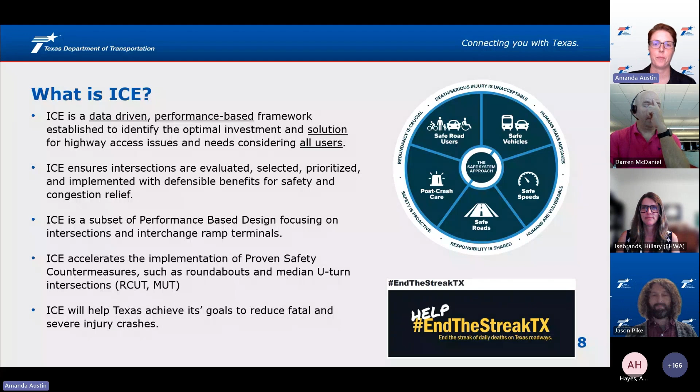Happy Free Slurpee Day.

I'm going to run through the memo that was recently issued by our chief engineer. I want to make sure that everyone understands all the key components. Now, obviously, it's only 1 page long, so it's not going to tell you exactly the whole intersection control evaluation process, but it does reference the new Traffic and Safety Analysis Procedures Manual, which we just published back in June.

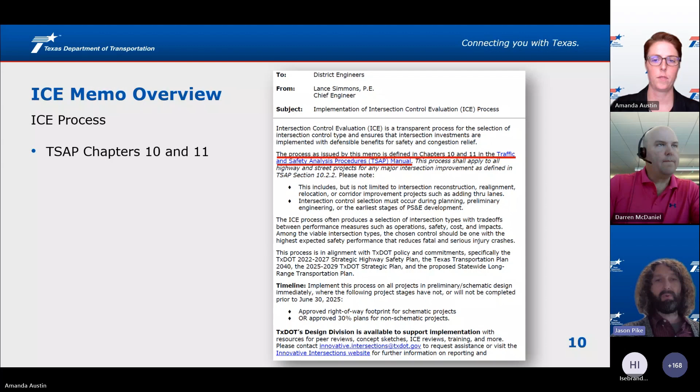Chapters 10 and 11 explain the process in detail. Chapter 10 is for intersection control evaluation, and Chapter 11 is interchange control evaluation. So it is the same process in both chapters, just different types of intersections. The next section of the memo talks about section 10.2.2 of the TSAP manual, which is what I refer to as the abbreviation for that Traffic and Safety Analysis Procedures Manual. So if you hear me say TSAP, that's what I'm referring to. But that does give specifics on when to apply the ICE process as well.

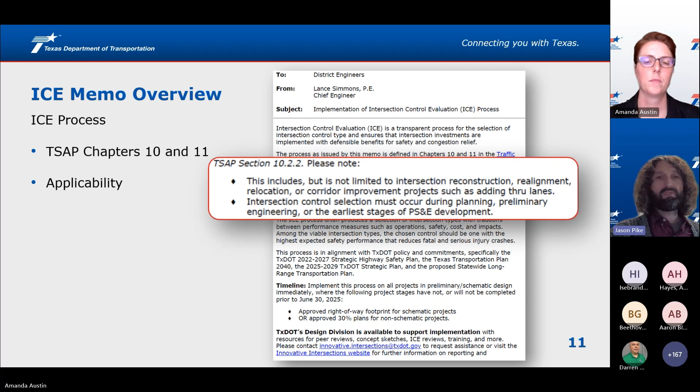And Amanda's going to cover a little bit more in detail later on the when, but the overall intent is, whenever you're reconstructing or significantly changing an intersection, that could include your corridor projects when you're adding through lanes. Anytime you have any of those projects where you're affecting an intersection or corridor projects where you're adding through lanes, that's when you should be doing the ICE process for each intersection.

So, we don't want to just evaluate the one trouble spot because all intersections have conflict points, as we mentioned. So again, we should be performing that ICE process on each intersection. And it should be done as early as possible in the planning or preliminary engineering stages as well. Let's see the next section here.

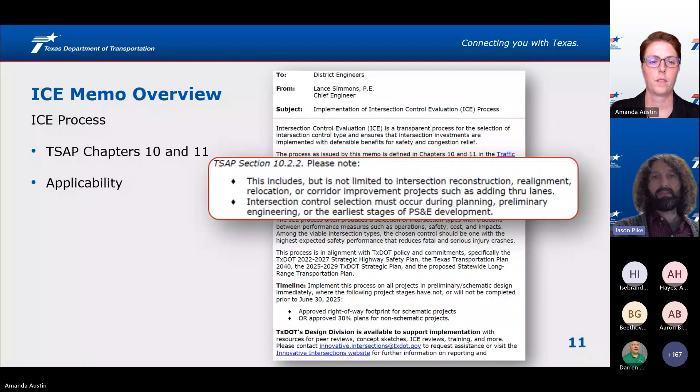So, obviously any analysis is going to produce trade-offs between alternatives. And I do want to emphasize that, I know we've talked a lot about safety here today, but the great thing about this intersection control evaluation process is it includes operations and other impacts. It's not just a safety evaluation. So when we talk about giving you a process to produce viable intersection types, it's going to take all of those other factors into account as well.

Again, as we've heard a few times this morning, in a transparent and defensible way. So you'll have some actual data to back up your viable selections there. Now, again, every project is a safety project, so we do want to emphasize here safety first. So among those viable intersection types, the chosen control should be the one with the highest expected safety performance.

So that's kind of the goal here, but I did want to at least emphasize here that it's not just a safety review, it's safety analysis, but this is also going to tell you which one of those underutilized intersection types will actually perform from an operational standpoint as well. So it is good tools for those folks who don't have as much experience with R-cuts or DDIs or any of those other intersection types. It'll be able to tell you very quickly which ones will perform.

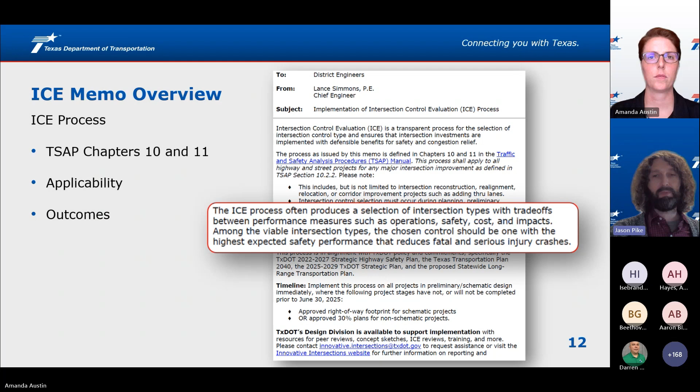And then again, I do want to emphasize, I can't say it enough, every project is a safety project. So once you've got those viable intersection types, be choosing the one with the highest safety performance. Let's see the next section here.

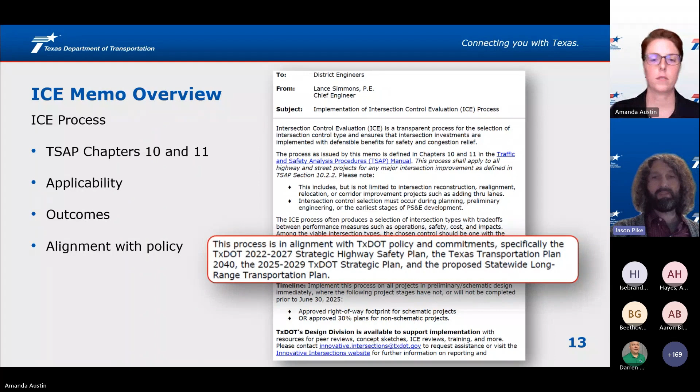The memo talks about how the ICE process is in alignment with several major TxDOT policies and commitments. And I won't go through all of those, but we do have a nice slide here that does go through several of them. For example, the Strategic Highway Safety Plan has intersections as an emphasis area and a strategy specific to ICE as well. Several other TxDOT planning documents prioritize safety along with the strategic plan goals of delivering the right projects and optimizing system performance.

As previously noted, ICE is about producing a transparent and defensible decision for the best intersection option. And then obviously the roadway design manual will discuss intersection control evaluation as well. And the upcoming roadway design manual update is going to have an entire chapter devoted to all the alternative intersection types.

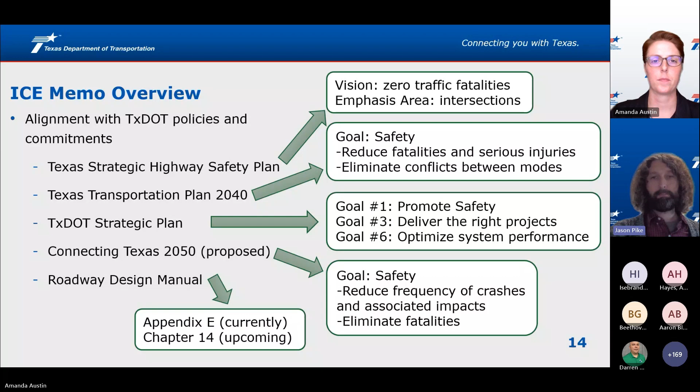All right, so the timeline here, the intent of this timeline of implementation is to catch projects early in planning and preliminary engineering stages. So I'm just going to kind of read this right off the screen. There was a lot of work that went into crafting this and a lot of feedback from districts and otherwise. So I'm just going to read it right off the screen to make sure I don't screw it up.

But the timeline is to implement this process on all projects in preliminary or schematic design immediately, where the following project stages have not or will not be completed prior to June 30th, 2025. And that is approved right-of-way footprint for schematic projects, or approved 30% plans for non-schematic projects.

So a quick note, I know not all districts necessarily have an approved right-of-way stage, but again, it's intended to be for when you guys are kind of locked down on your right-of-way. That's when we expect you to be performing that.

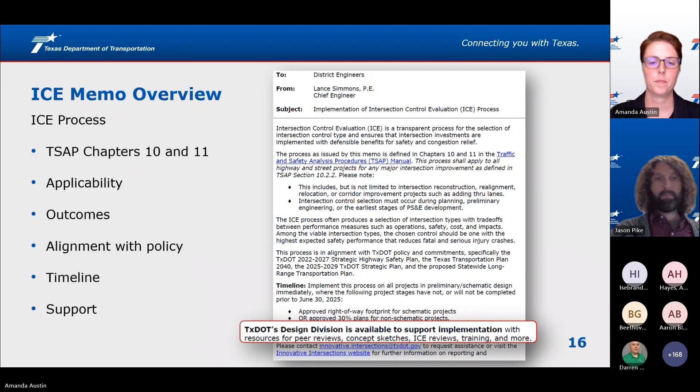All right, and finally, Design Division is available to support the implementation. We want you to be successful in implementing this. So we will be providing training and many other resources, which again, Amanda will cover here shortly.

But again, the real reason we're doing this here is, as Mo led it off with very well, and I think has been mentioned a couple other times by Millie and Hillary, 32% of our fatalities are intersection related. I know a lot of those other things are maybe more behavioral type situations with seatbelts, speeding and distracted driving. So intersections are something where we can actually take a big bite out of that apple. We can actually make an impact. And that's why this is such an important thing.

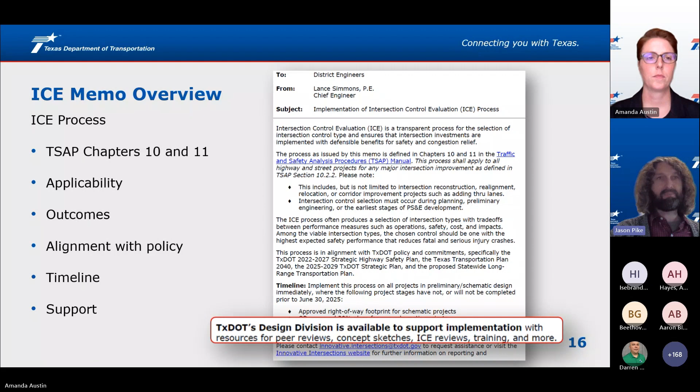So that's basically the high level thing of the memo. And I'll turn it back over to Amanda to talk through some of those resources and details. All right, thank you, Jason, for walking us through that. So as he said, I'm going to go over some more details in each of those sections and then talk about trainings and resources.

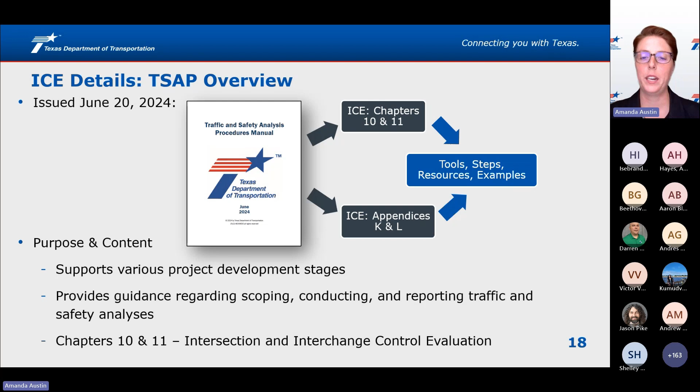So the TSAP, as Jason mentioned, the Traffic and Safety Analysis Procedures Manual, was issued June 20th, 2024, and it is available online on our manual site. Chapters 10 and 11 and the corresponding appendices, K and L, give tools, steps, resources, and examples for ICE. Now, overall, the purpose and content for the TSAP is to support all the project development stages and provide guidance specifically for scoping, conducting, and reporting traffic and safety analyses.

Now, to talk a little bit more about what's in chapters 10 and 11, it's going to give context, which includes workflow, applicability, and the different intersection types for ICE, and then it's going to outline a process. The process is a two-stage process. Now, stage one is high level. The level of effort is anticipated to be minutes or hours and not a major effort. Stage one looks at operations and safety. Operations more for viability. Will it even work? And then of your viable types, taking a ranking look at safety.

The primary tool that the TSAP recommends for operations is CAP-X, and for safety is SPICE. Now, please note that each of these tools have limitations in that they are planning level. In one of the appendices, Appendix L, I believe, there's a reference to a CAP-X-similar tool that does operations for interchanges. So it includes a few more options than the original CAP-X tool, which has mostly intersections.

So we provide all those tools, narratives on each, but using these tools, CAP-X and SPICE, are very, very quick. I did it myself. You put in your ADTs or your turning movements, and you get your results. For operations, it's looking at volume to capacity ratio. For safety, it's using predictive crash analysis, and it produces the predicted crashes, both fatal and injury, and all types of crashes for each of your intersection options.

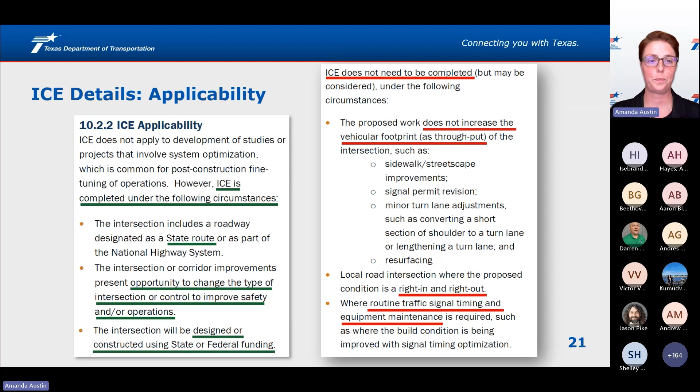So reporting, what do you do with an ICE once you have it? The ICE is primarily at the district level, but we have two ways that we would look at it at the division level. So we're working on updates to Form 1002 that will likely come out this summer, and the DSR will be updated and will likely come out at the same time as the RDM this fall.

With 1002, the section in 1002 will look very similar to the VE study section, and it basically asks three questions. Is an ICE required? Yes or no? If it is required, has it been completed? Yes or no? And if it's been completed, attach ICE documentation to this form. And so when you submit the 1002 to Design Division, we would expect to see the ICE documentation with it.

Now, one big question we get a lot is, how is Design Division going to be reviewing these? And it's going to be a high-level review. We will get the documentation, and we're really just checking to see that you're completing ICE, that you're looking at your options, that you're strongly considering safety. And really, we're only going to start talking with you if we're seeing something that looks amiss.

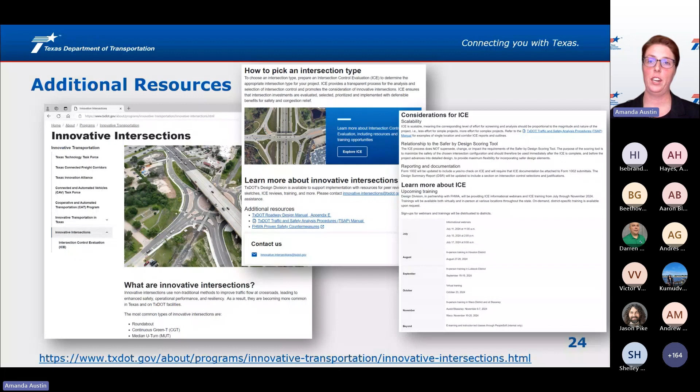If you are TxDOT, we will put you into the class immediately until we fill out the capacity. And if we have capacity within a week or two of the training occurring, we will then open it up to external. So if you are an external person on the call and you'd like to attend this workshop, fill out the form. We will reach out to you to add you to the wait list.

As Jason mentioned earlier, we are here to help. We really want this to be a success. We're very driven to improve our intersections, and we want to make sure that each intersection is a success as well. So we have the capabilities and the resources right now to help you. We want to be a resource for you. We can provide coaching, support, review. If you're listening to all this, making your head spin, you're not sure where to start, give us a call. We can talk with you.

If you're a consultant, or if you are getting a design from a consultant and you want a second set of eyes on it, we can do a peer review. In particular, what we really like about peer reviews is we don't just redline it and send it back. We really encourage having a meeting, talking through comments, because we see those as educational opportunities so that each time we get a design, it's better.

We can do concept sketches. We know roundabouts, like I said, are pretty tricky to get right. And so if you are considering a roundabout but aren't sure how to draw it or where to start, let us know. We can do the first concept sketch for you. We can work with you to draw it so that you're learning how to do them, but we can provide those. If you need a high-level sketch to determine your footprint, we can help with that as well.

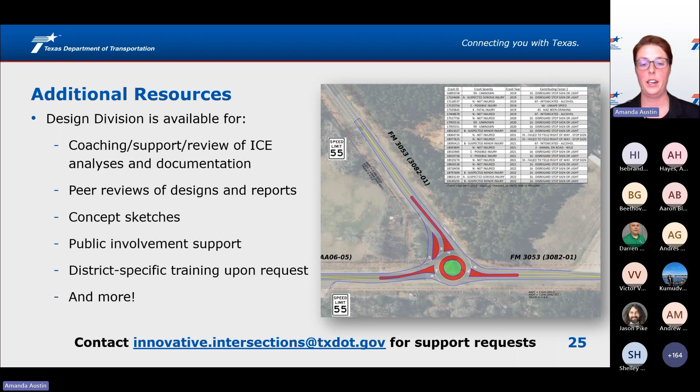We can send our subject matter experts to public involvement meetings as best our schedule allows. We can provide resources for public involvement. I know public involvement is really a hot topic for roundabouts in particular, and we've got a lot of resources for roundabout public involvement, and we would love to share them with you. And more. We already talked about the district-specific training upon request. We have an email address, innovative.intersections@TxDOT.gov, for support requests or for questions.

With that, that concludes the content for presenting, but we will be open for questions. So again, I believe there's probably already questions in the chat, or if you want to ask a verbal question, feel free to raise your hand. Darren will enable your mic to do that. And with that, Darren, I'll hand it off to you to tell us who's up. All right. So we have some questions in the chat. Metro districts are represented: San Antonio, Houston, and Austin, or Dallas.

The first question is from Chip in San Antonio. Will ICE be required for federally funded off-system local government projects? Good question. I believe so. Yes, that is intended when it's federally funded. We are taking a look at it and reviewing it, and so I believe the answer would be yes. Jason, any qualifications you might add? Yeah, we might have to get together with the local government group, John Jameson and those folks, to make sure we can get that on their checklist. So it might have to be temporarily not required, but strongly recommended, until we can get that formally included in all their checklists. Thank you.

Awesome. Thank you. And Milad, you had your hand up a while ago, but you have a question in the chat, so I'll go ahead and ask it. Is ICE a similar process as the safety tool evaluation process? Are you talking about the Safer by Design scoring tool or the safety scoring tools? Milad, your mic is now enabled. Yes. Good morning. We recently started using the safety tool to evaluate the intersections, which is pretty new, at least to myself. And my question is, are they similar or are they different?

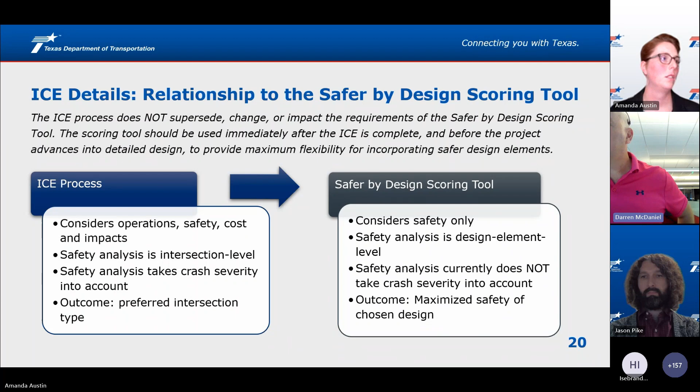All right, we've got Beethoven Garcia in the Pharr district: TCP and maintenance for one-lane roundabouts seems to be a challenge. Do we have examples or recommendations on these areas? Yes, we do. Right now, they're more on an as-provided basis. It is on our list to pull together go-bys for traffic control. Phasing and staging can be tricky for one-lane roundabouts. It totally depends on your existing situation, your width of pavement.

One thing we're also looking into, we just had a great meeting with the STR division earlier this week, is looking more into modular or temporary roundabouts. So that also changes the staging and phasing. Maintenance, it depends on your roundabout, what you have for truck aprons. I think most of our, especially on-system single-lane roundabouts, will probably have pretty good truck aprons to allow for big trucks, oversized, overweight. Those truck aprons do provide good spots for maintenance vehicles. So again, depending on your situation, reach out to us and we can pull together some go-bys for you if you'd like.